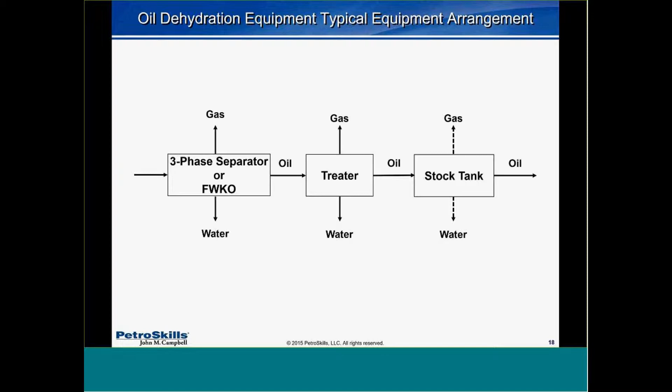So in a typical dehydration system, we go through a separator, get out some of the oil, gas, and water, hit it with a treater that can apply heat or electricity, and then we go to a stock tank, and we're separating out these three things. But in this diagram, there's no place for an emulsion to go, because the water's going to be either trucked off or, offshore, it's going to go overboard. The oil is going to go down a pipeline, and the gas is going to go to a gas plant. We make emulsions, and we also have solids.

A typical Gulf of Mexico configuration, where we start off with a primary two-phase separator, a free water knockout, and a bulk oil treater here. This is where we're doing our water treating, and then we've got some hydrocyclones. Every place needs a trash can. All roads lead to a sump system or a slop tank, and they're normally small. It's offshore facilities. You don't have a lot of room.

About this one, and you can tell with the rule that I just told you, this is the problem stream. You don't want to be doing this. The tank shown here is going to have solids in it and slop. So you don't want to mix this into where you're trying to separate oil and water and resolve your emulsions. You also don't want to take your hydrocyclone overflows or your skims from your inert gas flotation cells and recycle them back to the front end.

They've already been through the process once, and they didn't end up in the gas, and they didn't end up in the sales oil. You don't want them overboard, because then you're sheening. And in any case, if you're deep well injecting it, you don't want it to go there either. So the best place to send them is to a dry oil tank and just move them forward.

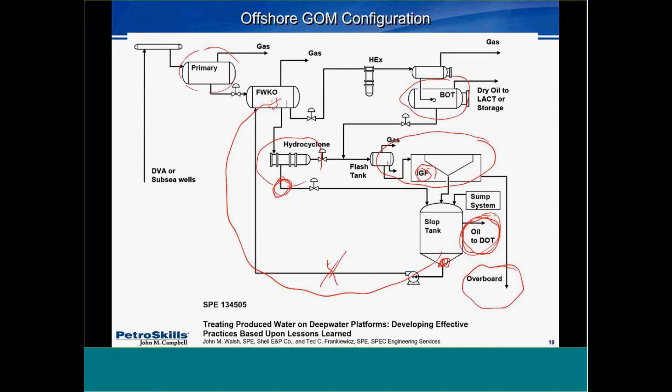Designers are going to ask you: a 90,000 barrel a day oil facility, or 100,000, treating oil and water. You've got an off-spec or within-spec oil of 0.5 BS&W. These are your dehy skimmings and your water treating skimmings. Where do you send these two streams? Because they're going to be high in solids. The emulsions will form. What do you do?

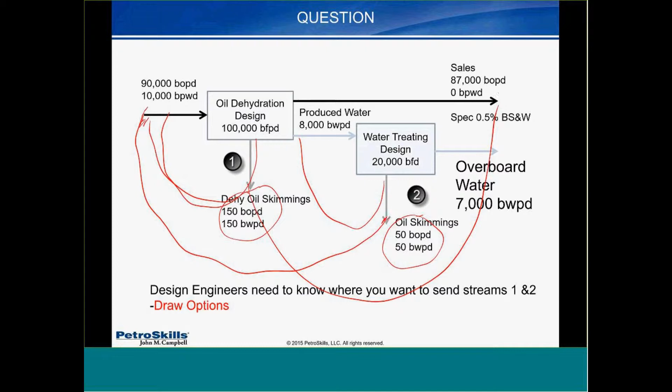So what I just showed you, one of the designs takes them and recycles them back to the front end. Another option is you can take them this way and this way, and then you can send them into the sales system. The question is, where do you think we should tell the designers to send those?

Okay, where you really want to send them is C. There's space within this 87,000 barrels a day of on-spec oil to send it to the refinery. You're still processing within spec, and you haven't upset your oil dehydration train or your water train. And the main thing is you're not mixing fluids that have contacted both dehydration emulsion breakers and water clarifying chemicals. Believe me, we'll show you a demonstration.

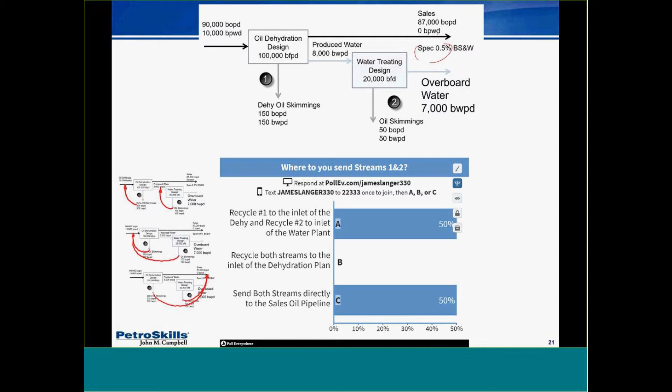Why is this happening? Well, the real world's more complex. Most designers want to show that they're not sending any water into the sales system, even though you're allowed to. And the BS&W spec mainly is water, not solids. Most of the solids offshore end up in the produced water and go overboard. And again, I mentioned the chemical people regard this as proprietary. So you may have two different chemical companies working on the front end and the back end of the system. You may have Baker working on the front and someone else handling your water treating chemicals.

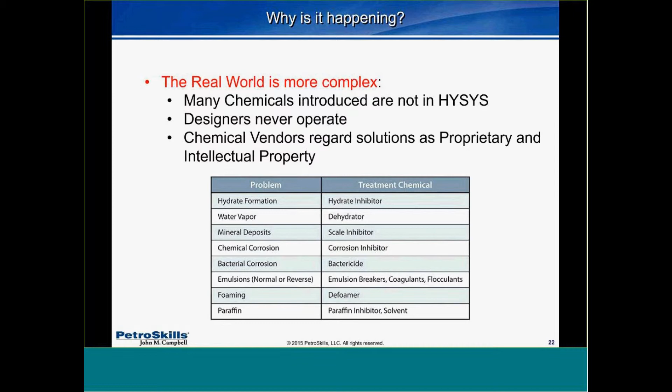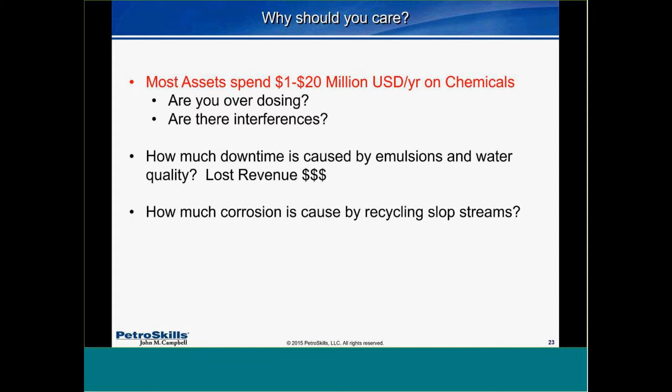I was in Africa one time offshore, bunking with a guy from Baker, and I was talking about this with him, and I said, why don't you guys ever mention this to the operators? And he just kind of smiled, because people normally just add more chemicals. Assets spend about $20 million a year on chemicals. Are you overdosing? Are there any interferences? And how much downtime and loss of revenue is being caused by emulsions? Also, how much corrosion is being caused? We'll show you why that's a problem with the design.

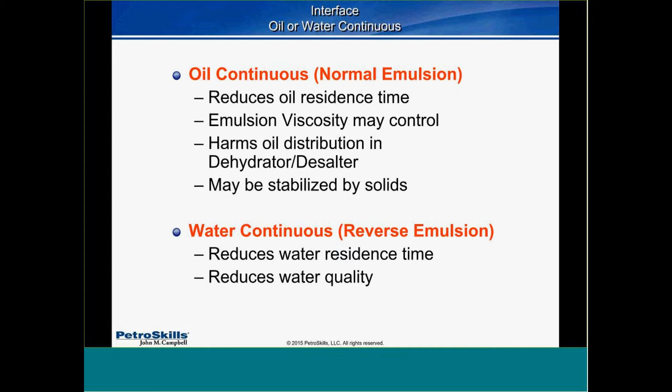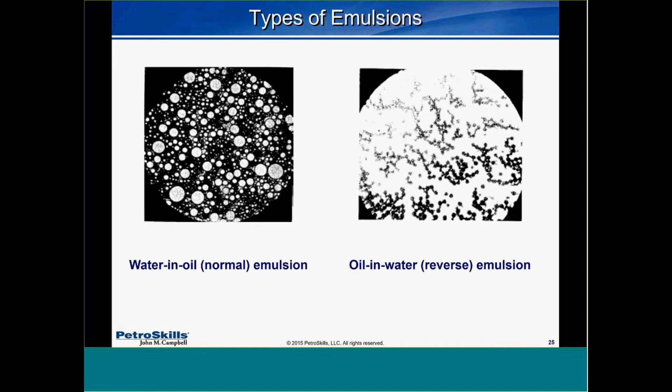So, in emulsions, a normal emulsion is water in oil, where oil is the continuous phase, and reverse emulsions are oil in a lot of water. Most reverse emulsions, if not 100% of them, are man-made, whereas normal emulsions can occur in nature. This is what they look like under a microscope. The left is a normal emulsion, and the right one is a reverse emulsion. Physically they look a lot different. One looks like drops within a continuous phase, and in the other you can see some complex interaction with the drops. That's part of the coagulation, flotation, and flocculation.

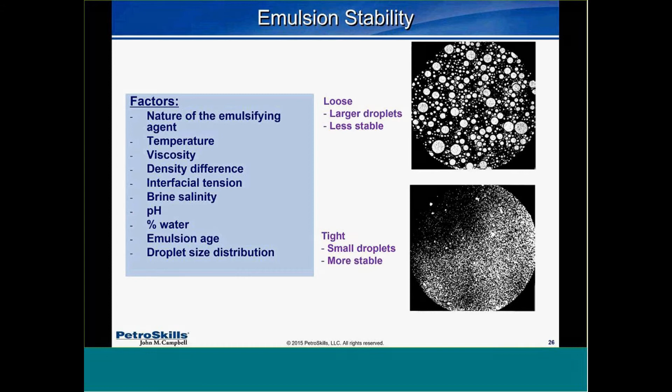Stability is the size. The smaller the size, the tighter the emulsion, the more difficult it is to resolve into oil and water. In the previous Gulf of Mexico example with the slop tank, you remember they showed a centrifugal pump. That's the best pump for making tight emulsions because it just shears the fluid. You really want to have positive displacement pumps: gear pumps, Moyno pumps, PCPs.

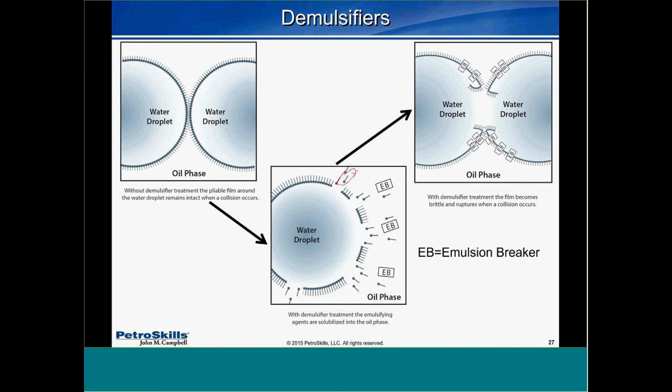The way emulsifiers work is you have a hydrophilic end, which is the dot, and a hydrophobic end, which is the tail, surrounding the water droplets. The emulsion breakers break this surface tension and allow the droplets to collide and get bigger. According to Stokes' law, the diameter is the most important driving force. It causes the water to drop out of the oil.

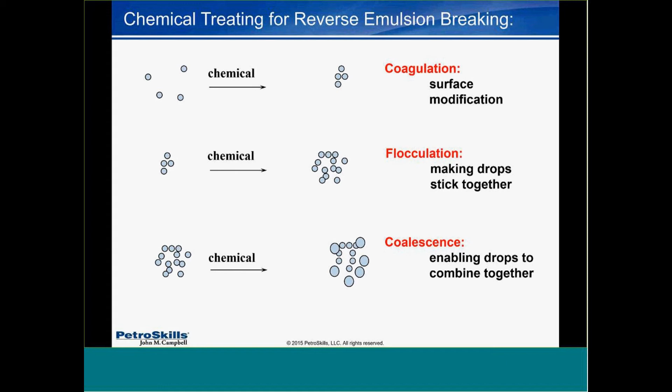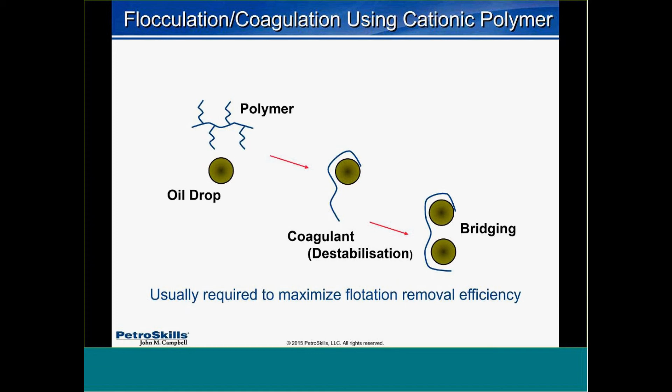For reverse emulsions, there are different chemicals. There's surface modification with coagulation and flocculation chemicals to cause them to stick together and then coalesce, which will allow you to skim that off. In coagulation, you're using a polymer, and all these are used in parts per million relative to your fluid.